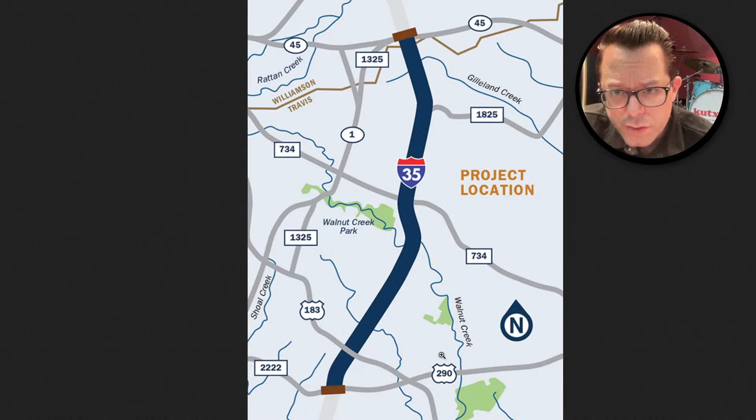But we're going to talk a little bit about the road lane shifting and how they're working this. TxDOT wants to keep at least 3 lanes open at all times during this project in each direction, with the exception of occasional closures at night.

So we have a lot to jump through here, and I want you to understand that it might seem like we are skipping some stuff because I don't want to spend 5 hours going through 4,000 to 5,000 pages of documents. Really, my goal here, because you can go and read the story right now, I'd like to just show you what I'm doing, and hopefully through this you will want to be able to look at these documents for yourself if you want.

If there's a specific intersection or a specific concern that you have, you'll be able to download these documents. They're linked at the website at the story. They're linked on our guide, our ultimate guide.

And sorry, I've got a lot of windows going on here, so I'm a little distracted. But we've got at the very bottom, I want to show you this, just get it right out of the way. This is a really long story, y'all. Look at this. Oh my God. See, we can't spend 5 hours doing this.

But right here, available for download, 1.8 gigabyte zipped file. And what we're going to be looking at is essentially 6 PDFs. And I'm going to go to them now. And they're all a lot of technical stuff like this. And I'll just sort of orient you, because I've spent a lot of time going through these, just give you an idea of how to find what you're looking for.

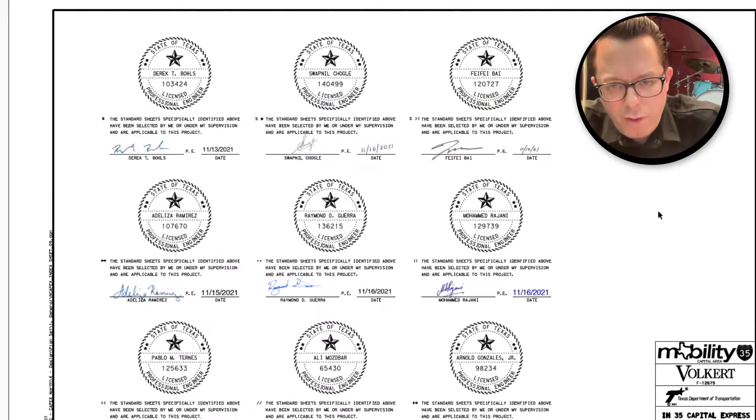I don't know. They could raise that if they wanted to, but a big question, and I'm going to do more reporting on this, so stay tuned, is does this actually work? Do managed lanes actually work? How do they enforce this? How do they make sure that there's at least 2 people in the vehicle? Because if there's no enforcement, it's just going to be like any other general purpose lane.

The lanes are also going to be available for use by transit vehicles like Cap Metro buses, and first responders, ambulances, and police, of course. We're going to go over some new bridges at Howard, Braker, Grand Avenue Parkway, and Wells Branch. The bridges at St. John's and 183 and Parmer are going to stay the same because those have been revamped in recent years.

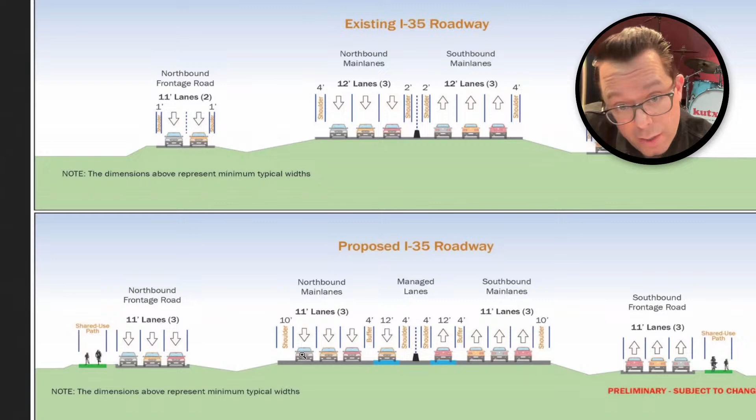This is not even quite accurate because they're saying 3 11-foot lanes northbound and 3 11-foot wide lanes southbound. But some areas are going to be 4 lanes wide. Some will be 5 lanes wide if you include the auxiliary lane, like main lanes. And then some frontage roads will only be 2 lanes wide at certain points. So this just gives you a basic idea.

They're making this road wider. The right of way is going to grow by 17 acres. So 5 auto businesses were forced to relocate because of this. Automobile businesses like repair shops and stuff. And there's a lot going on here.

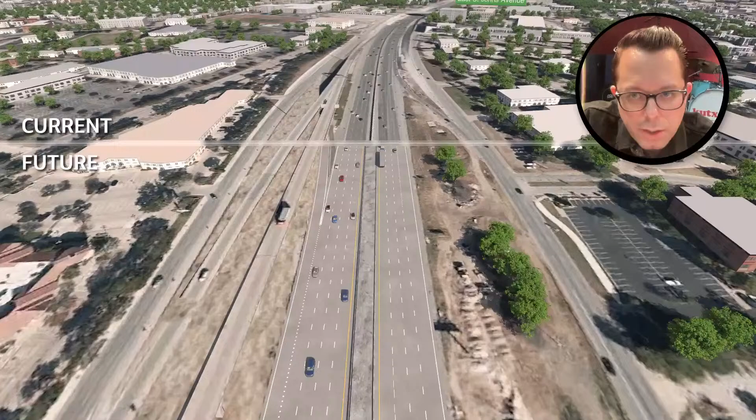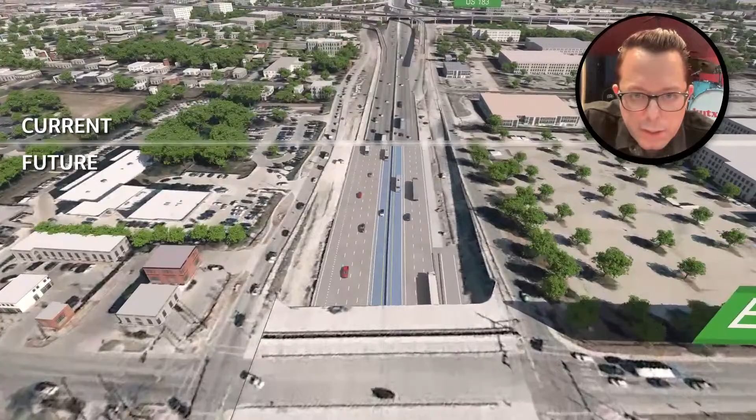So first of all, I got some drone photography for this thing. Check out this. I want to show you this. When I went to the groundbreaking, TxDOT had this fly-through video, which kind of gives you an idea. Of course, it's animation. It's a little sanitized, I guess, but it's a little mesmerizing, I'll be honest with you, these animations, especially when you're looking at a gigantic screen. But we're gonna go. So let's begin by starting at the very northern edge of this, SH45.

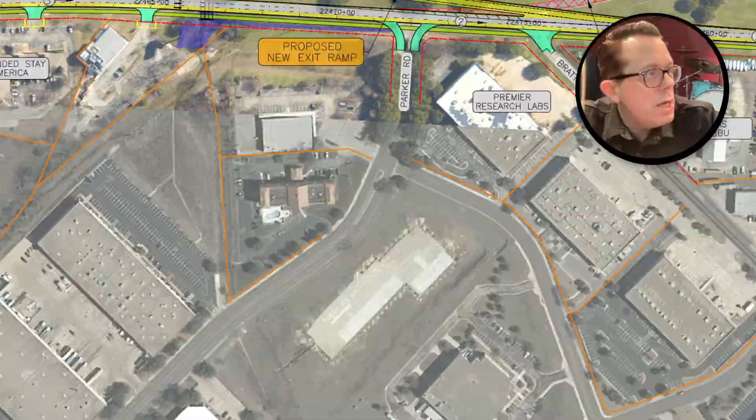And I think what we want to do now is first dive into the other document, which you can find linked on the story, which is the schematics. Now, these are from 2021. These are preliminary schematics. Parts of these have changed. So this is not the final plan. The final plan is in these documents, these 4,000 plus pages.

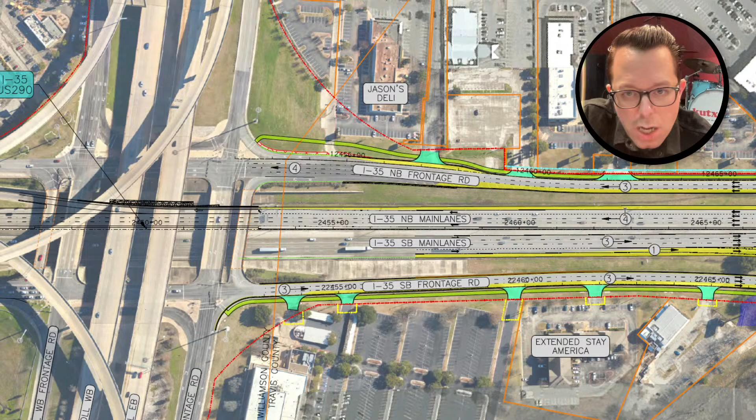So this is right here, SH45. And there's not going to be new ramps added from I-35 to SH45 as part of this. That will be another phase of I-35 expansion that is happening north of this point into Round Rock. TxDOT right now is sort of in the studying phase of that. And again, you can download this and take a closer look. But maybe let's start by orienting ourselves with the legend. And these legend colors aren't always accurate either.

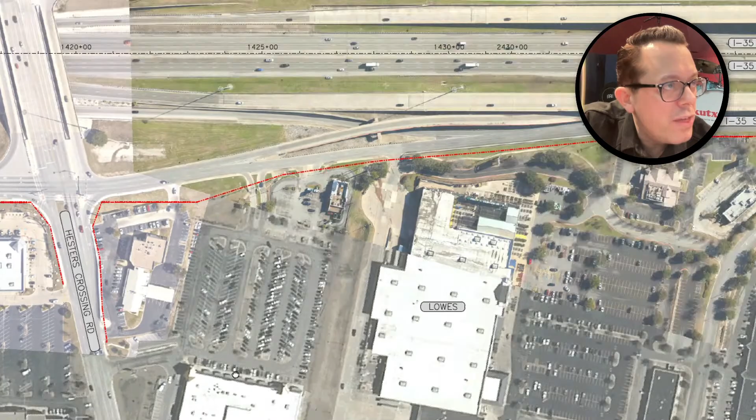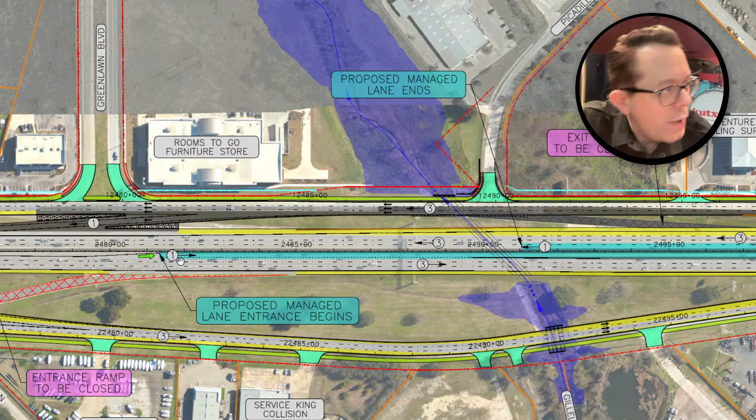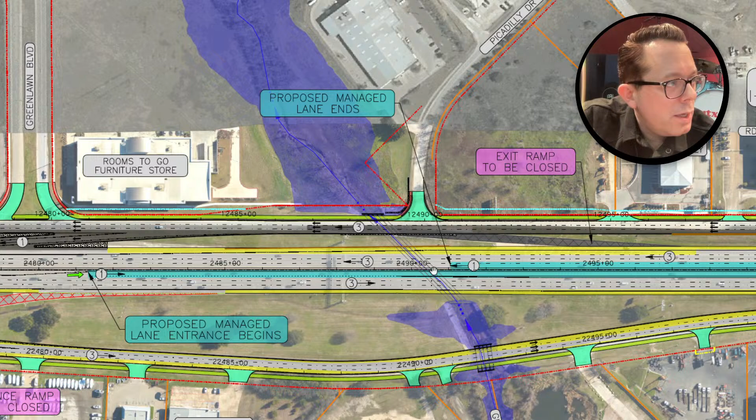But essentially, the main colors we want to be thinking about: these little arrows show where the ramps are going to be to get on and off the managed lanes. The managed lanes themselves are this sort of green color here. And then the yellow is new construction, new pavement. And so as we move south from SH45, we see where people will be able to enter the HOV lane just right around Greenlawn Boulevard, past this Rooms to Go. And a little south of there is where people will be able to exit the HOV lanes.

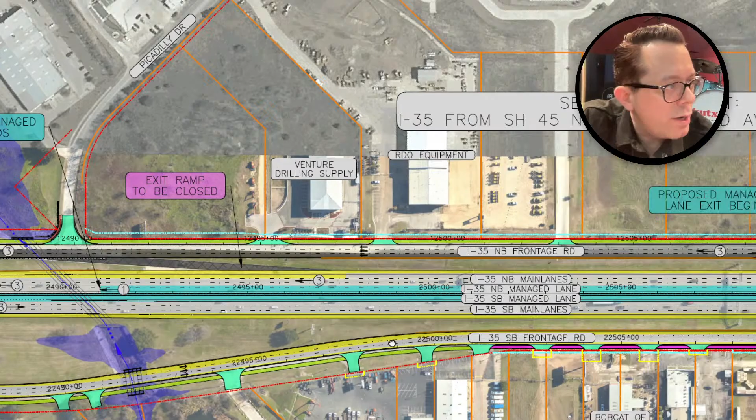And I should say, forgive me for not pointing this out in case it's not obvious, but in this schematic map, north is to the left. So north is that way, south is that way. And so we're working our way from north to south as we scroll this way through the project. Right here we can see there's some widening going on with the southbound frontage road south of SH45. Not a ton of changes here.

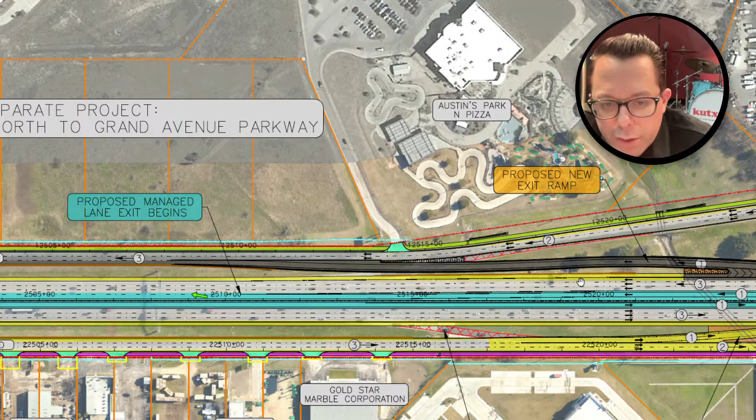This little green line is the shared use path, they call it, which is basically like a wider sidewalk for cyclists, pedestrians, scooterists, rollerbladers, someone in a wheelchair, you know what I mean, shared use path. Now, the schematic is 6 pages, and on the first page there's not a lot going on. It's the northern edge of the project. But you can see right here, this exit ramp will be closed, and there's going to be a new exit ramp here. And this is part of what TxDOT calls a ramp reversal.

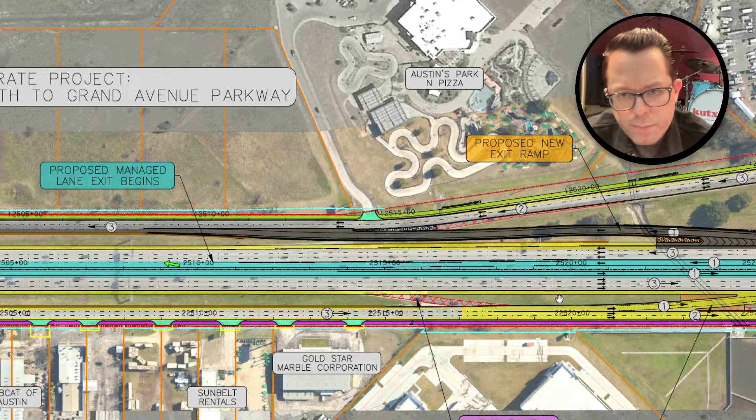And they're doing a number of these ramp reversals where they close an exit ramp and open an on-ramp, or vice versa. And the idea there, I talked to TxDOT about this and some engineers, and their thinking is basically new highway design standards make it safer, according to them, to have more distance, often more distance before the destination intersection. So it used to be like when you exit for Main Street, you want that exit to exit right at Main Street, and then you pull off and you're at Main Street.

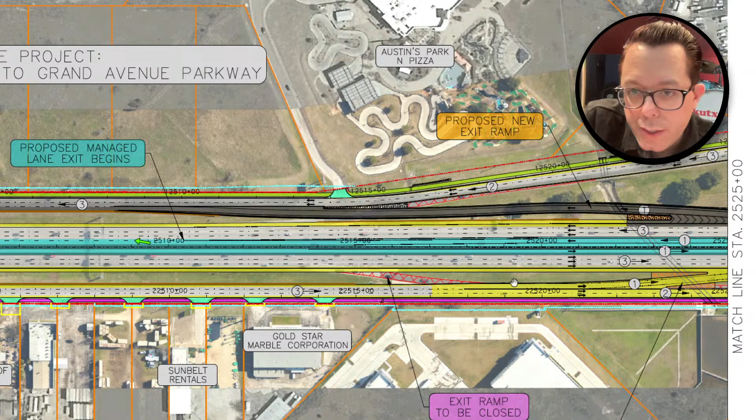But TxDOT is saying they would prefer, and it's not in all cases in these exits, to have more room for people to merge over if they want to turn right on Main Street, instead of having to cut across 3 lanes of traffic super fast. So here we've got a proposed new exit ramp. Now, some of these, and I don't have my notes in front of me because all my notes are in that story, but you can read through it. But some of these are just slight shifts when they talk about a new entrance ramp, or they're making the ramp a little more straight instead of a sharper turn.

Let's go down to page 2 here and go all the way over to the northern end. A lot of scrolling is involved in this. So here's our match line. And again, I wanted to try and teach you how to fish, so to speak, so you can look at these documents for yourself. That's honestly my main goal of this. And let me know if you have any questions.

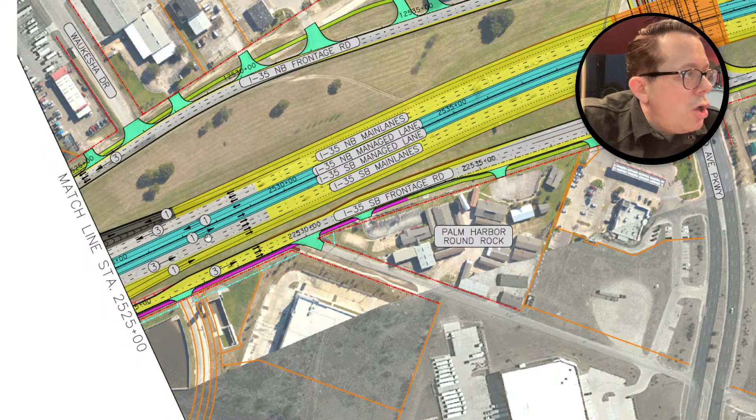So let's keep rolling along here. We're cruising south on the new I-35 Capital Express North. And here is where we start to see some more things going on. First of all, this yellow is, again, resurfaced road. This is just north of Grand Avenue Parkway, the first sort of major intersection that we reach, not including SH45 North. And let's just take a look at Grand Avenue Parkway, because I do have a nice little drone photo here of Grand Avenue Parkway. And there's something I wanted to show you about this.

So this is sort of an overhead. You can see they've already torn down the northbound bridge, and they've sort of divvied up traffic on the southbound bridge, and that's why you wind up with these super narrow lanes, 11 feet wide typically during the construction period, and some of them are going to be permanently 11 feet wide. But some will remain 12 feet wide. CapEx Central downtown, they're all going to be 11 feet wide, so they're going to be shrunken lanes.

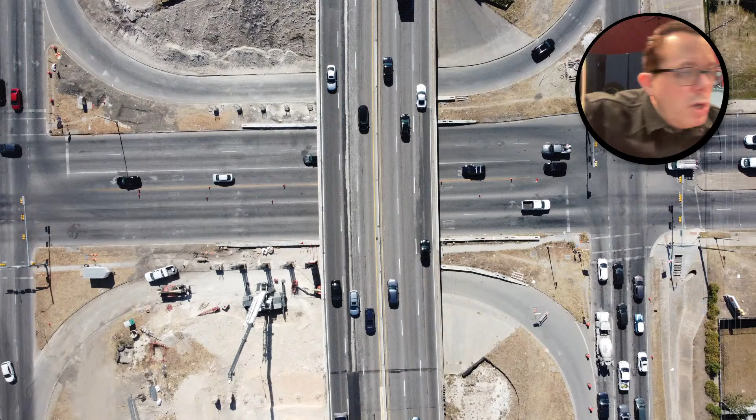And if you wonder what an 11-foot wide lane feels like, you can drive on Mopac north of Lady Bird Lake to about 2222. The lanes there are pretty much all 11 feet wide, including the express lanes. TxDOT and CTRMA shrunk the width of the lanes to fit them all in that area. So back to our schematic. This is where we're at.

And orange means new bridge. New bridge. This entire bridge will be reconstructed. And I'm going to show you something else up here real fast. I don't know if they have this. I might have to go back to the story. Here we are. So Grand Avenue Parkway itself comes up here to Central Commerce Drive. Now let me show you real fast what it looks like now, because this is going to change.

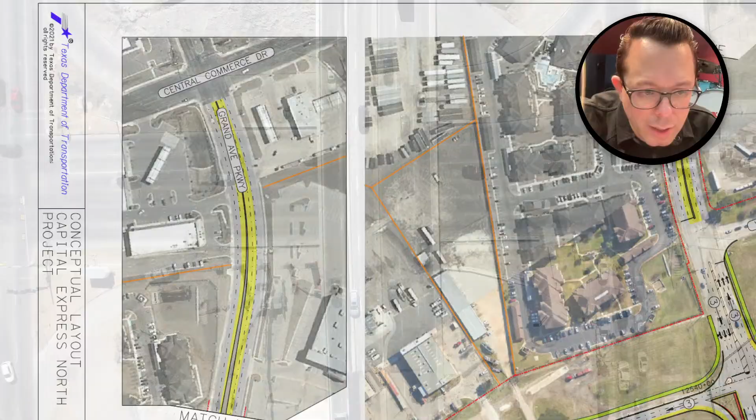This is just east of I-35, and you can see these medians in the middle of the road. They're kind of wide now. Well, when we get to, you see the yellow, these medians are going to be narrowed to almost nothing so they can add more lanes on Grand Avenue Parkway. So if I drove around there, I would be very interested to know that. Otherwise, sidewalks going in on the side here.

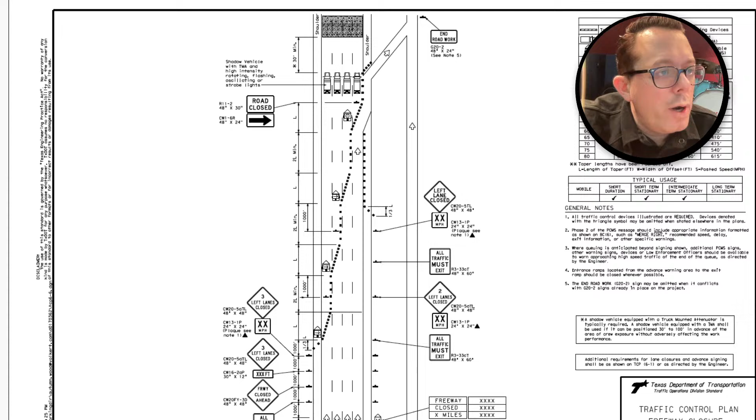And I have cross sections of these. So let's take a closer look at some of the more detailed drawings. These are called the 100% plans. And these are essentially the plans that are given to the contractor. These were designed by Volkert. And just quickly to orient yourself here, if you want to dive into these, I'm going to flip it to page 1. Okay, so there's 6 of these documents. Document 1 is 920 pages.

Just to give you an orientation here, if you're trying to look at these yourself, page 1 gives you a bunch of technical information, but the table of contents is really helpful to figure out which PDF to look at. And you can see volume 1 is a lot of the traffic control plans, the temporary stuff that they're doing while they're constructing the highway. Volume 2 has a little more detail, but I spent a lot of time on volume 4 and 5. Especially volume 4, because there's a lot of detail about the bridges and the cross sections they're going to be building.

Volume 6 is a lot of technical stuff like water lines and telecommunications and wastewater lines, the kind of thing your average person is probably not very aware of, but maybe that matters to you.

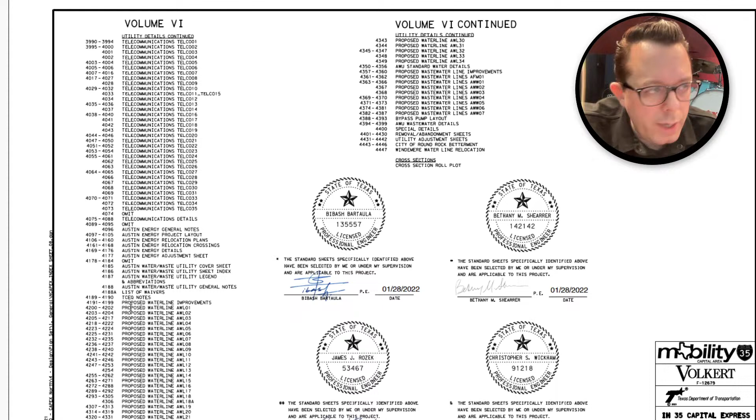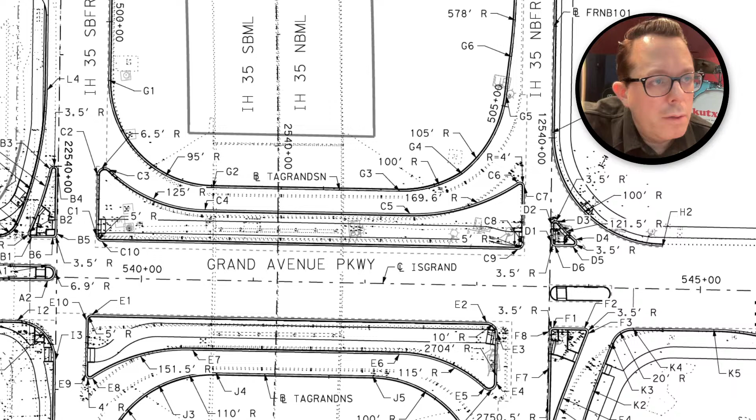So I have a bunch of bookmarks here. Now I'm jumping around. We wanted to look at Grand Avenue Parkway, and if you look at these docs, you can get a more detailed view. And I'm not going to spend a lot of time on all of these because we don't have that much time. But just if you're wondering, like, what is the layout going to be? Will there be a slip lane here? Yes, there will be. Let me zoom out a little bit, and then volume 4 here. Do I have Grand Avenue Parkway bookmarked? It's just a matter of doing a Control F and looking for your favorite street.

But another thing you can search is typical section. And this is going to be I-35 at Grand Avenue Parkway. And you can see it's going to be 3 12-foot wide lanes, because 3 times 12 is 36. I don't know if you can read that, 36. And a 12-foot wide managed lane in each direction, and a 10-foot wide shoulder. So it's not a huge change to where it is right now.

But also, if you are on this page and you go up, again, just to orient you, you can find the phased view, what it's going to look like while it's under construction. Right now, for your reference, we're under phase 2. So this is kind of what it looks like under phase 2 construction. Again, this is a proposed typical section, so some of this stuff could change. And then it's going to switch up to this in phase 4. So all of these proposed sections have the before and after, if you will, and then the in-between.

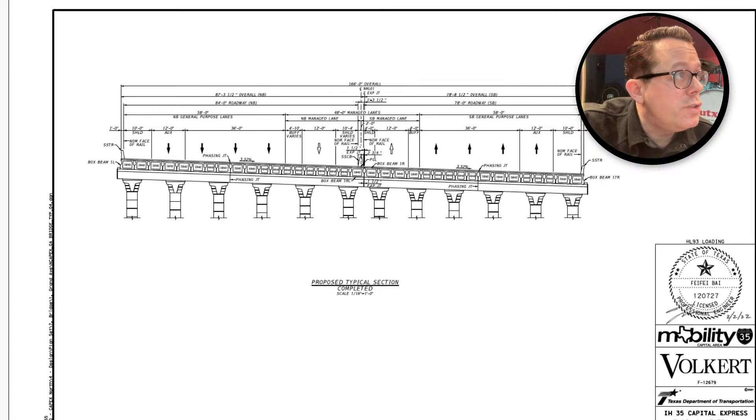Section 1 of this, there's a lot about the traffic control plans, and there's so many technical details here, but here we go, traffic control plan. Some specific information here that's relevant. A lot of this never made it into the story because 8,000 words is already long enough. But there's the contractor. These are directions to the contractor, which is Pulice. I think I'm pronouncing that correctly.

And they're owned by a gigantic Spanish firm called ACS, which is one of the world's largest construction firms, a huge mega corporation. They're building right now a dry dock for nuclear submarines at Pearl Harbor. That's just one of their projects. It's like a $2.8 billion project or something. So this is a massive company, but their subsidiary is Pulice. It's a little confusing if you're not used to seeing these trucks driving around that say Pulice on them. It looks like a law enforcement vehicle, but it's a U instead of an O in police. So it's not the cops, it's the contractor.

The shared use path will be the last item to be constructed. I thought that was interesting. They talk about how they're going to put these along the entire length of the highway in both directions, but it will be the very last thing to be constructed according to the traffic control plan here. But pedestrian traffic must be maintained at all times.

If you are a business owner along the highway, you may be interested in this. They're supposed to be contacting you at least 5 days before they do any driveway construction. So you should get advance notice. 5 days is not a ton of notice.

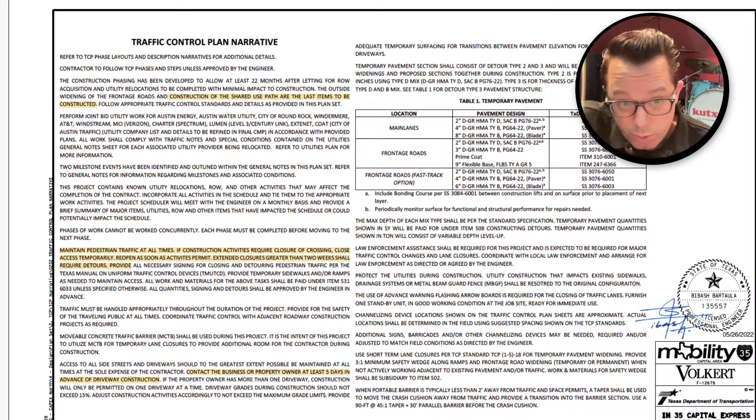And then, are the bridges being reconstructed for better safety, integrity, or to accomplish something else? Jennifer Thal. Great question, Jennifer. The bridges are mainly being reconstructed because they have to be wider. The I-35 bridges over cross streets are being reconstructed so that they can have more space for all of the lanes. And then the cross street bridges, and there's only one that's being reconstructed, which is Breaker. It's not a huge change, but we will get to that.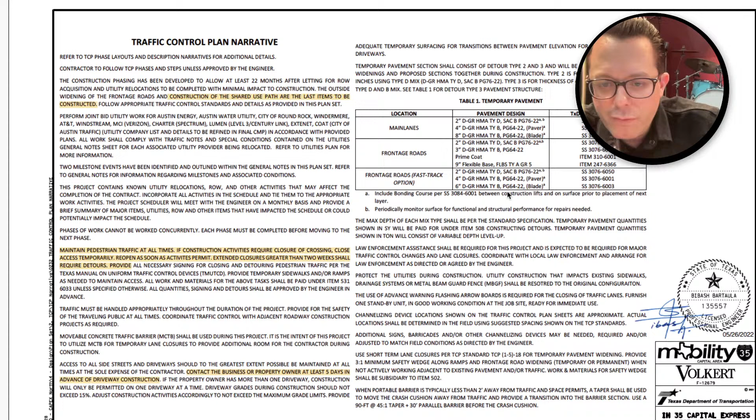Let me jump here. I think those are all the questions for now, but if you have more, pop them in the chat. This is going to go longer than half an hour. I'm sorry, but we're just getting started here, and I'm enjoying this. I hope you guys are too, because I love to nerd out on this stuff, and it's in these details where the devil hides. This is where you find out what's really going on. You have to scroll to learn.

But I just wanted to walk you through real fast, and let me zoom out a little bit so you can see. I wanted to orient you. If you're opening these, keep an eye on this bottom right area here. This little square kind of tells you where you are. So when you're flipping through real fast, it's almost like a flip book. I found this immensely helpful to orient myself, especially as I'm doing a Command F, enter, next, looking for something related to a specific street.

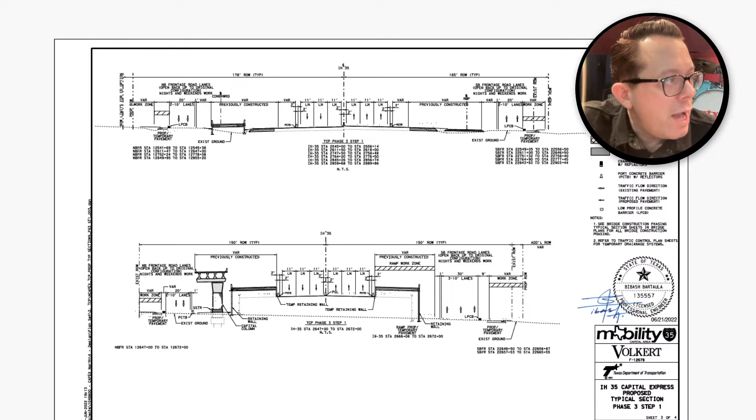These are the proposed typical sections. Throughout, again, there are the match lines, or the location identifiers that you can match up with the schematics if you really want to know more. But let's just zip along here and try and move along a little bit faster. So I really want to open up my story, because I don't remember off the top of my head all of the changes that are coming to every single section. But I can talk a little bit more about it as we scroll through.

Now, one thing that I have to apologize for is that when you're reading this story, you can't click on the images and make them bigger. It makes me so mad. But what you can do is right-click and download the image, or more easily copy image link. Or what I'm going to do is drag the image up into my browser, and it opens full screen. So these are bigger images. They're just shrunken on the website. So that will hopefully help you get a closer look without necessarily having to dive into the schematics. So we talked about the ramp reversals.

Pardon me while I get a drink of water here. I've been talking a lot.

Ramp reversals. Let's just keep moving a little bit further south. We cross over Gilliland Creek here. This is one of several creeks, 9 creeks that this project crosses over.

And I thought this was interesting. TxDOT says the highway is being constructed to allow for inundation of the roadway during a 100-year flood without causing damage to the road or property nearby. This is just a map of Gilliland Creek. Basically this creek wouldn't cross I-35. It's all the runoff from the highway and from SH-45 that makes it that much further, because the source of Gilliland Creek is Ward Spring outside Pflugerville.

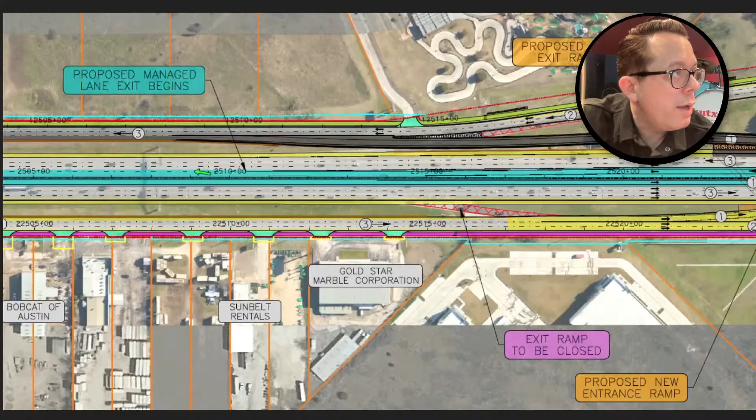But as we move a little bit further south here, and let's just make this a bit bigger, you can see what's going on here. And where are we now? We are just north of Grand Avenue Parkway, which I think we've gone over before, right? So now we're at Grand Avenue Parkway. I showed you the changes there. I showed you this cross section. New bridge over Grand Avenue Parkway.

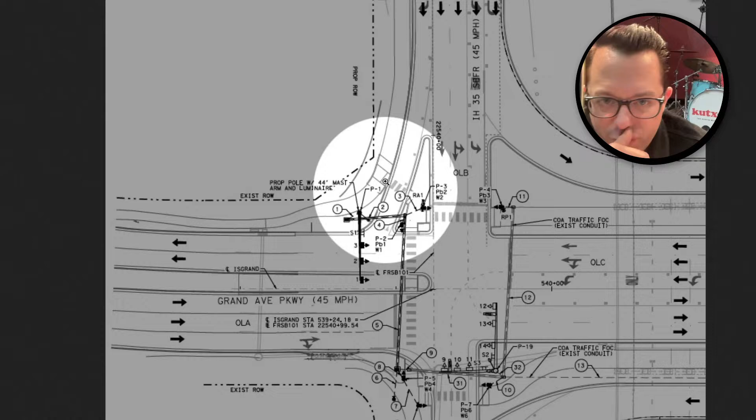I wanted to highlight these slip lanes. You're going to see a lot of these throughout the project. What a slip lane is, probably most of you know if you're watching this live stream, but it's a lane where vehicles can make a quick right-hand turn without having to stop for a pedestrian or for a traffic light. And it's great if you want to turn right, not so great if you're on foot and trying to cross the street, because you just kind of got to wait for your moment and then make a break for it. It's only one lane, I realize. It's only 15 feet or so, but it still can be kind of a pain in the butt.

And so there's going to be this slip lane here. This is the southbound frontage roads. I know this is sort of oriented in a weird way, but these are the southbound frontage roads turning right onto Grand Avenue Parkway. And then the northbound frontage road is going to get double right turn only lanes at Grand Avenue Parkway, but there will be a traffic signal there. So that's one of the differences that TxDOT is doing. And I already talked about the changes to Grand Avenue Parkway east towards Central Commerce Drive. It's going to get another lane in each direction, essentially.

As you're going through these, what I did is I had Google Earth open so I could compare side by side, because some of these are not accurate. And I don't know this section of I-35 as well as I do South Austin, because most of my time in Austin I lived in South Austin, and I live in South Austin now.

But for example, this exit ramp to be closed should read entrance ramp to be closed right here, because we're talking about going north on the frontage road. Again, the ramp is being closed, but it's just shifting, so it's a little bit more of a gradual merge onto the highway. And then going southbound here, some new surfacing.

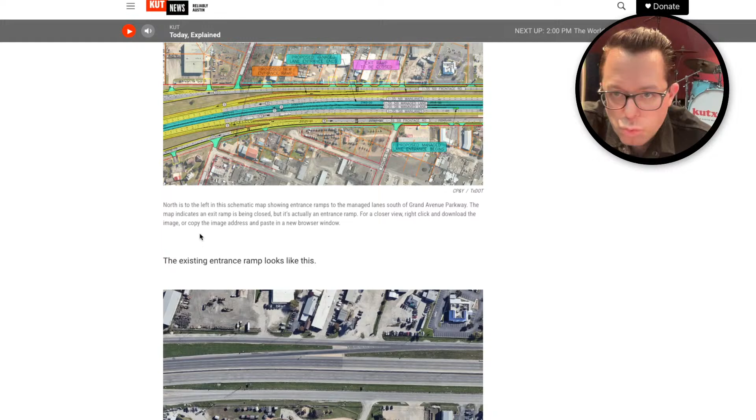And then right here, sort of south of Grand Avenue Parkway, is a new entrance for the HOV lanes. And where are those on-ramps? Is it going to be near where I live so I can get on the managed lane, or do I have to go down like 3 traffic signals or 2 exits or 2 intersections, cross streets? So

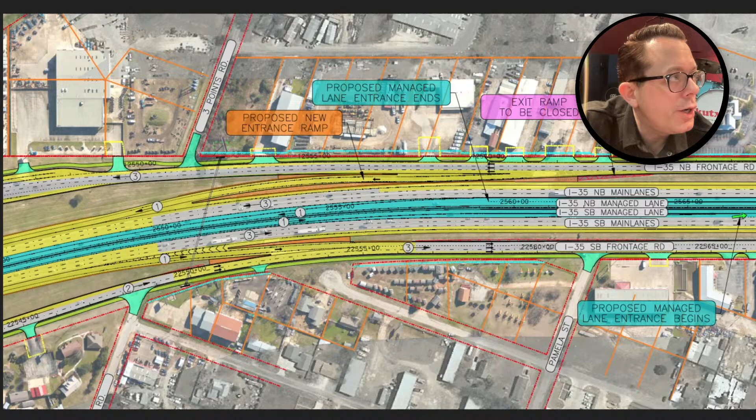let's keep going here. On Pamela Street, another opportunity to enter the southbound managed lanes right here. This is what these green arrows are. If you're looking through the schematic, you can see where those are. So a new ramp, proposed new entrance ramp. We're having new ramps here. Ramp action happening.

Now, I added this late in writing this story, but I just wanted to show you what I'm talking about. Some of these ramps are a quote unquote new ramp, but what they're doing is just smoothing out the drive on the ramp so it's less of an extreme angle. I don't know if you can see this, but in the satellite view it's a more harsh on-ramp, and this one is more gradual. So there's that. Let's keep rolling down here. Wells Branch Parkway. All right. So, okay, Wells Branch Parkway.

Let's get to, we have a new question here. Sarah Jenkins says, what types of sound barriers will be constructed and where will they be? Excellent question, Sarah, because there's going to be 8 sound barriers, and here, this is Wells Branch right now, but I want to get to the sound barriers, because to me, I'm an audio guy.

I work in radio. I love audio, and I'm fascinated by sound, and I've reported on the noise barriers and the noise concerns for this project before. So there are going to be 8 of them. However, it's important to note that many of the locations that will have louder sound because of the expanded highway will not get sound barriers. And there's a reason for that we'll get into.

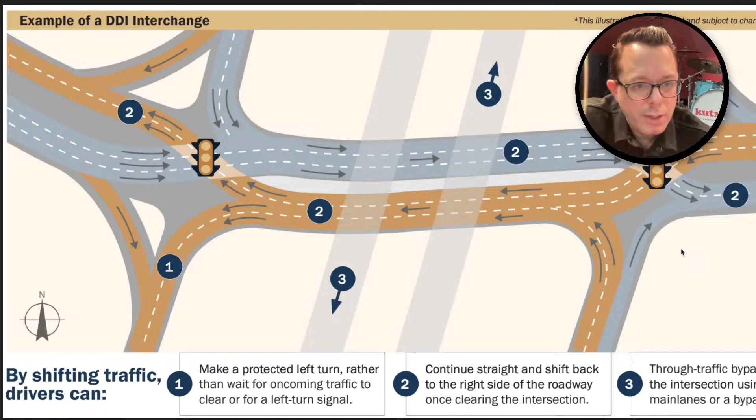I just did want to show you this because I have an animation that illustrates what it is like at Palmer Lane. Oops, I turned myself off when I wanted to turn off Wells Branch. And so this is at Palmer Lane. You kind of see the flow of traffic here, and one of the disadvantages of these, if you use I-35 regularly in this area, is if you're on the frontage road, you cannot continue south or north.

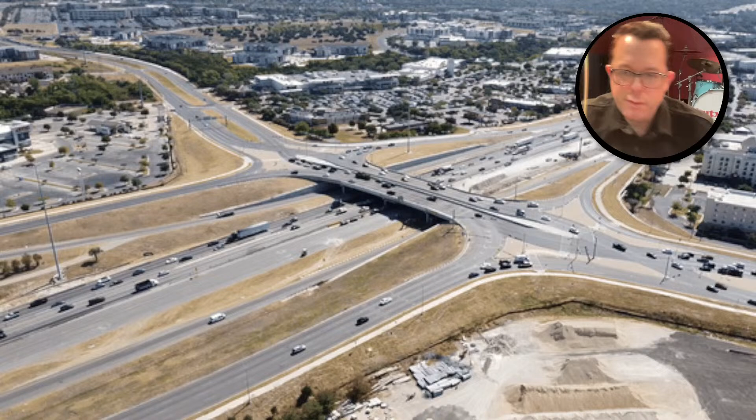You have to basically take the bypass lane, which you can see that little white truck going southbound on the bypass lane. Or if you miss the bypass lane, you have to take a right down here on Palmer, go down, do a U-turn, come back on the westbound lanes, and then continue southbound, or vice versa on the other side. So they're not perfect, they have some advantages and disadvantages, and TxDOT has decided that Wells Branch is going to get a DDI.

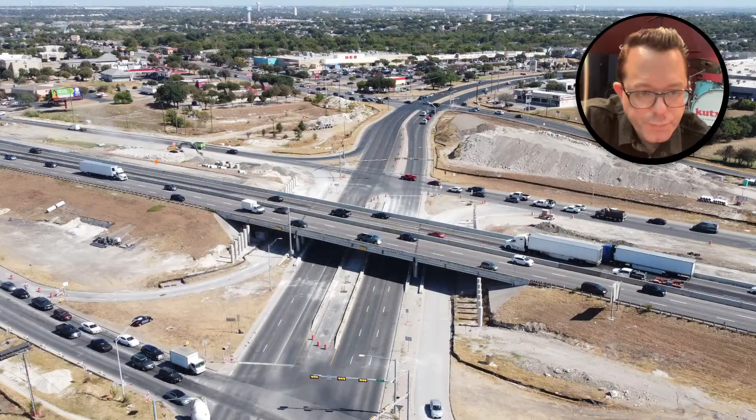So let's see what that will look like, because we have an illustration right here, and this is from the schematic. Very similar to Palmer Lane. This will be the first DDI at ground level in the Austin area. The one at 360, I believe, will also be at ground level. Basic configuration, you get the idea. DDI at Wells Branch, diverging diamond interchange, and you can look that up.

In fact, there's this TxDOT video, I'm going to mute it. There's this TxDOT video that was made when this one opened in, what was it? 2015, 16? I forget when the first one opened in Round Rock, but it kind of shows you the animation. So we don't need to go over that forever.

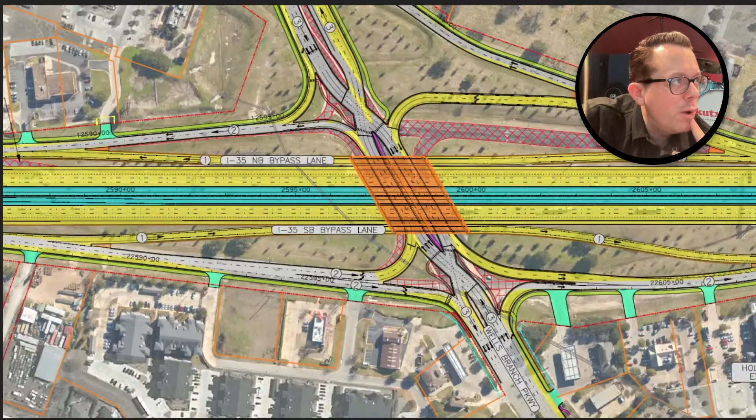One more point. This is just to highlight my point that if you're a pedestrian, you're going to cross these slip lanes. This is Wells Branch, right? This is with the DDI. You're going to cross this unsignalized slip lane, no traffic signal. Here, there will be a traffic signal. Then you'll be walking on a shared use path between 3 lanes on one side, 3 lanes on the other, and then you cross back over here, depending on what direction you want to go, right?

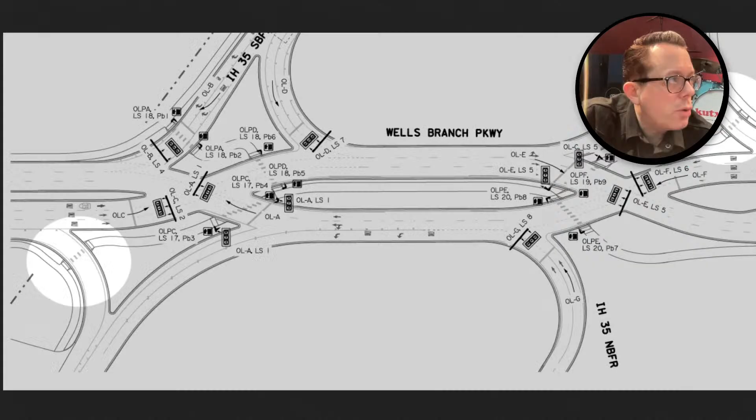So this is some more information that just shows where the traffic signals will be placed in this DDI. Again, you can see all this in the story. Let's just take a quick look at this cross-section. So this is the cross-section of I-35 at Wells Branch. This is what it will look like.

And we see something here that's very different than the initial cross-section that we had when we first started showing. I think I might have closed it, but it was one of these, the colorful one. This is the actual plan, and this is the typical section completed. So let's start from left to right here.

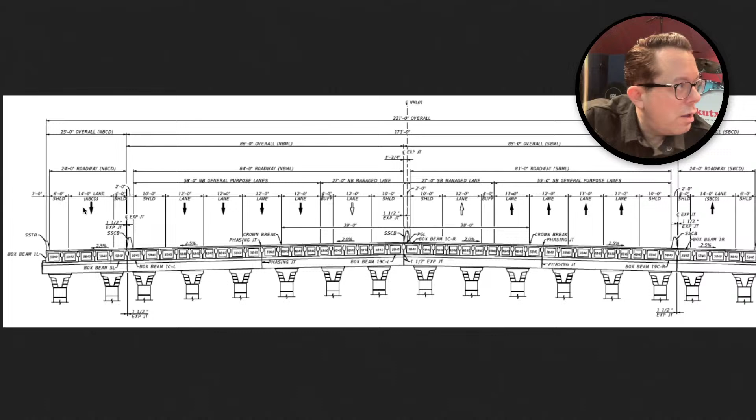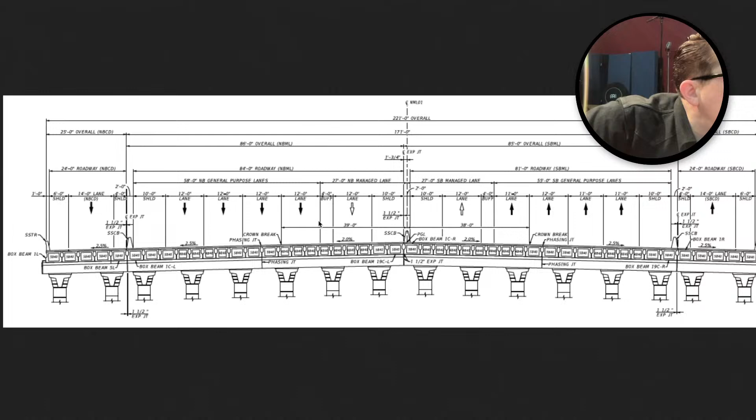6-foot shoulder, a 14-foot collector distributor lane. This would be the bypass lane, I think that's what that is, if you want to avoid the DDI, the interchange. Okay, main lanes, 10-foot shoulder, 12-foot, 12-foot, 12-foot, 12-foot, going northbound, 12-foot, 12-foot, 12-foot, going northbound.

Southbound, managed lane, 11-foot, 12-foot, 11-foot, 11-foot. So narrower lanes, a little harder to stay in between the lines, a little more nerve-wracking at times, but there's arguments that people will drive a little bit slower. There's been some research on this. I did a whole story about lane widths and how that can affect driving, but it's a little less comfortable in an 11-foot lane, especially on a freeway like this.

We're not talking about side streets where we're worried about pedestrians crossing, and this is like a limited access freeway. People are going fast, and so 11 feet is not as comfortable, but it does allow them to cram in more capacity without having to seize as much property.

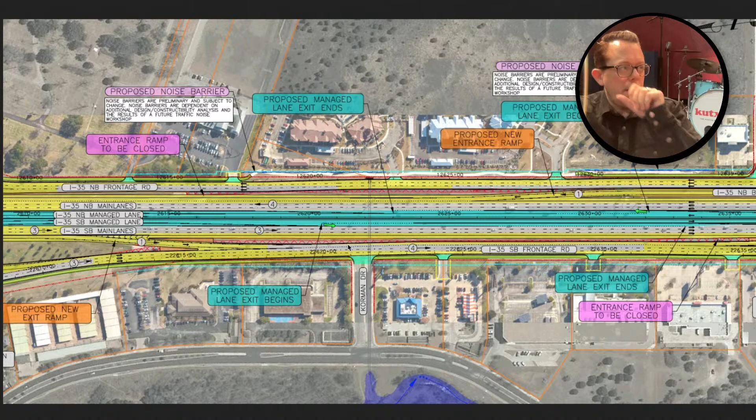So again, we're moving along here. This is south of Wells Branch Parkway now. And as we go south of Wells Branch Parkway, you see some reconfiguration of the ramps here, an exit for the southbound managed lane, exit for the northbound managed lane, some ramp shifts and reconfigurations.

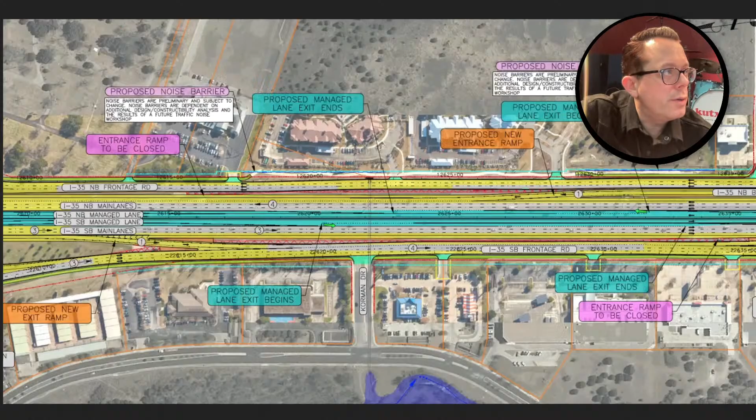The Federal Highway Administration, FHWA, has certain noise limits for different types of properties, like hospital and child care center versus residence versus business, etc. And each one has sort of a benchmark, essentially an average of the noise. If you go over this many decibels, you have to consider. I'm sure anyone who is a specialist is cringing right now because I'm giving the super simplistic version. But basically, if it gets too loud, they got to build a barrier.

But they only have to build the barrier if, how can I say this? Well, I said it right here. If it costs less than $25,000 per benefited receiver. What is a benefited receiver? What TxDOT does is they put these little receivers, like noise loudness testing machines, in certain locations along the highway, and they have a map in their

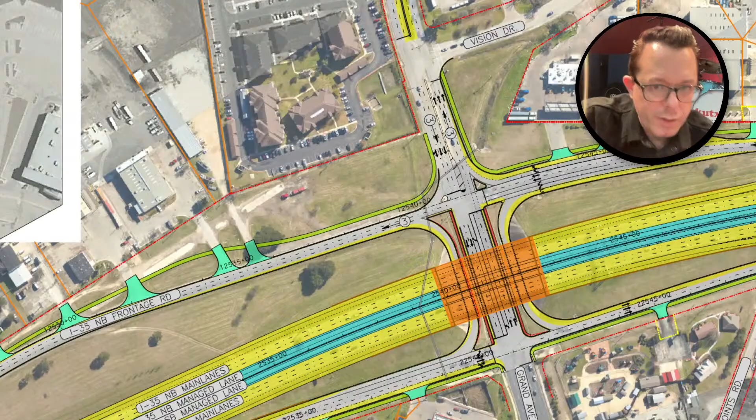sorry, I'm just jumping around windows here, their environmental impact statement, which I thought I had open, but I guess I don't. Let me just crack that open real fast, so I can show you where all of these receivers are, because this is an important piece of this project. It really is going to be louder, and not everyone is going to be able to benefit from a noise wall. Of course, noise walls have their drawbacks too. They block the view. They can block airflow in certain ways.

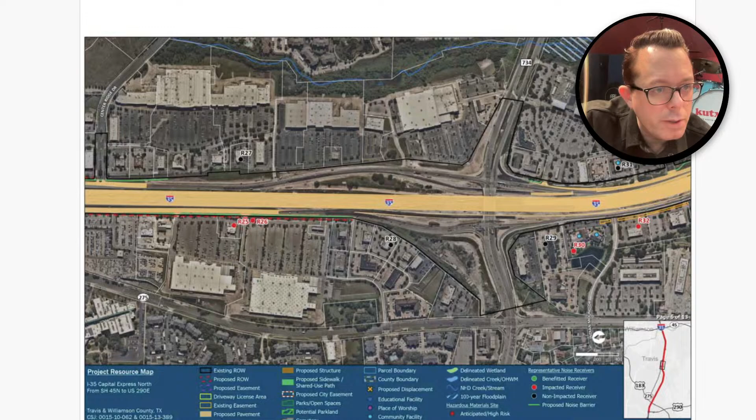But let's see if I can open my noise barriers. Okay, so it's right at the bottom. It's Appendix F. Okay, maybe I should just rotate this. So you can see here these R25, R26. Have I got all these windows open? Let me zoom in a bit more here for you. So this is like a receiver, receiver 25, receiver 26.

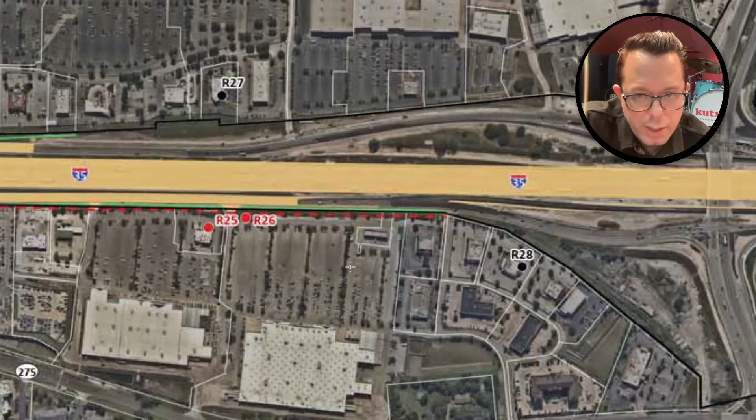They did almost 100 of these different receivers where they put them in and they test the noise levels, and then they use some mathematical calculation to determine how much louder the noise will be. And you can read more about their mathematical calculation in their actual noise traffic technical report right here, which is linked to in the story, and they go through some of the methodology.

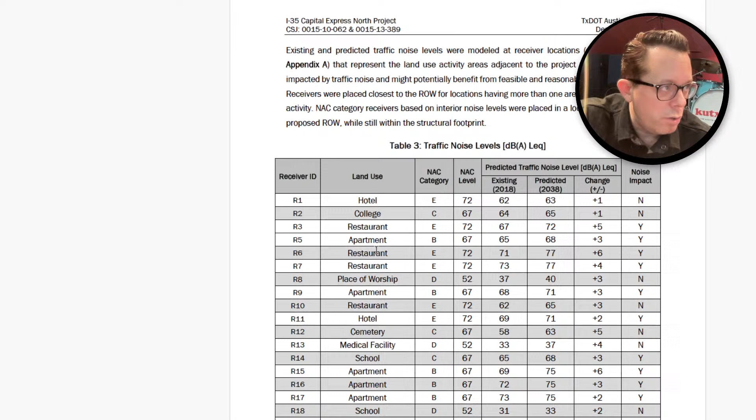But like you can see here, R1, receiver 1 was a hotel, receiver 2 was a college, and let's take one here. Receiver 6 was a restaurant. The NAC level, which is sort of like the federal standard, is you want to have it no more than 72 decibels. And I'm saying decibels, but it's like a measurement of decibels that is an average. I won't get into the details of that, but let's just say 72 decibels, right?

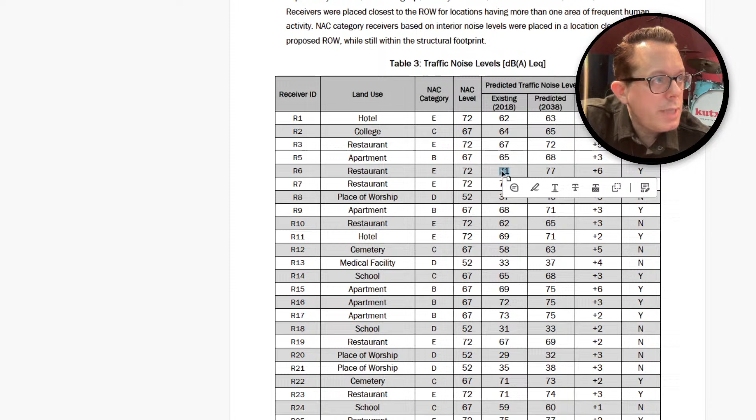That's the NAC level at this restaurant. In 2018, when they did this, it was 71. And the predicted traffic volumes in 2038, it's going to be 77, so 6 decibels louder. Now, what is a decibel? Just for some reference, if something's 10 decibels louder, it's basically perceived as being twice as loud. If it's 10 decibels quieter, it's going to sound as if it's half as loud. It's sort of a logarithmic thing.

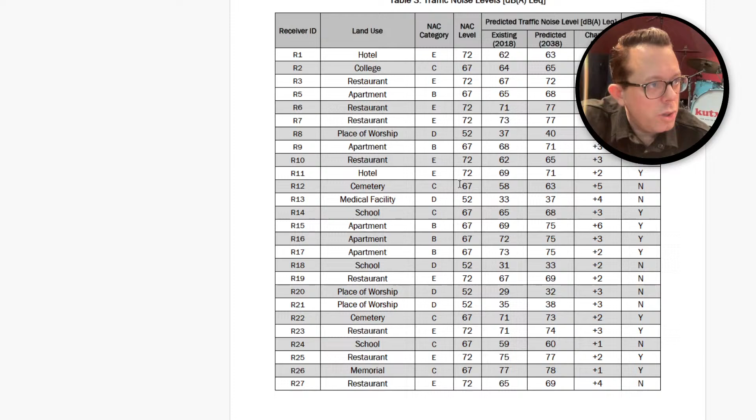So will there be a noise impact? Yes, there will be a noise impact, but this restaurant will not be getting a noise barrier because of a number of different factors. Among them is this calculation that for each of these receivers, if the noise barrier per receiver or per benefited household or whatever costs more than $25,000, then they don't have to do it because then it's not considered reasonable.

And if a noise barrier that is 20 feet tall would not reduce the sound by at least 5 decibels at at least half of the receiver locations in that area, then it's not considered feasible. And it's not required under federal law. And this is an issue with all highway projects. It's not just an issue with I-35.

So let us take a look at some of these noise barriers. So Lantower Ambrosio Apartments on the east side of I-35, south of Wells Branch, is going to get a 510-foot-long noise wall that's 16 feet high. That's going to cost $146,000 or about $8,000 per affected household.

Another fascinating thing is the Cook. So let me go back to the schematic here. There's 2 cemeteries along this route, and one of them is right here at Wells Branch, Capital Memorial Park. They're both owned by the same company, Cook Walden, and we have the email that Cook Walden sent to TxDOT here that basically says, nope, there's no interments of any type outside our fenced area. So go, we're not worried.

So TxDOT is not worried at all, because in that area, all of their construction will be contained to the right-of-way footprint of the highway. So they're not worried about digging up graves, basically. But both of these cemeteries are going to get louder. These are quiet places where you go and reflect on your lost loved one.

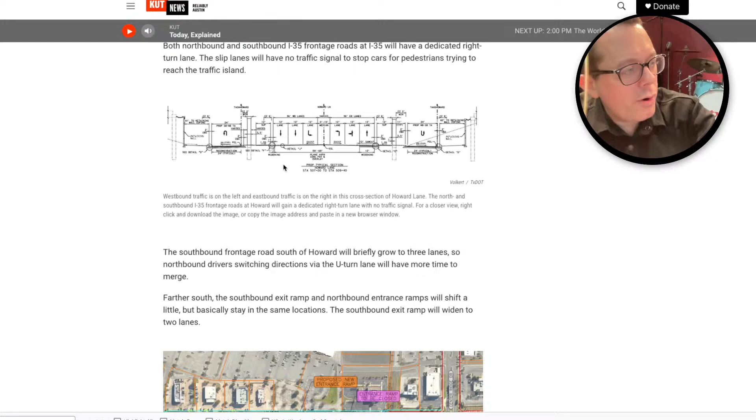I don't want to take more than an hour of your time here, so I'm just going to zip through some of the rest of this, and then you can go through and check this all out for yourself. This was a ton of work. I can't really explain everything in an hour. This was an interesting component that I learned about, and it's not in the schematics, and it's not in the environmental report. I only learned about it from talking to TxDOT and Cap Metro.

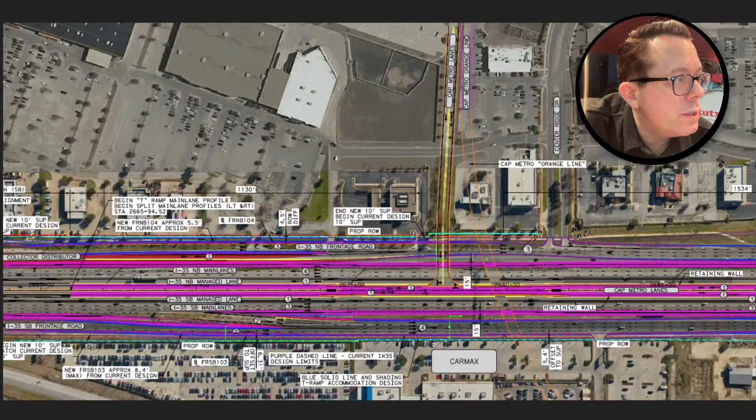So let's go to the Tech Ridge Park and Ride. I don't know if you've ever been here before, but it is a place where you can park and ride. And there's a whole bunch of different transit routes there, 135, all of these you can get to from the Tech Ridge Park and Ride. So what is going to happen here is TxDOT's going to build a ramp, and it's not like a huge flyover ramp for northbound and a huge one for southbound. It's more like just a bridge over the highway. These are going to be elevated, and you can kind of see that in this cross section. So you have this elevated bridge that crosses over the highway and goes up here to the Tech Ridge Park and Ride.

And essentially the idea here is, with Capital Metro buses, you want people to ride transit, you got to make it faster than driving. And this is maybe one way to do it, at least driving alone, because of course if you have 2 or more people in your car, you can take the managed lane yourself. But this could improve Capital Metro service if they can keep the managed lanes flowing. Of course, that's a very big if. And I thought this was interesting: Cap Metro Orange Line, this orange line coming through here. There's not going to be an orange line coming up here for quite a long time, but I guess if they do want to build it there, they're thinking about it at least.

Okay. Palmer Lane, not a ton of changes because this DDI was just installed pretty recently, although they're going to do some resurfacing here where, as you can see in the yellow, this is all new pavement. This bypass lane that's proposed already exists.

South of Palmer, a new northbound entrance ramp. See, northbound entrance ramp right here. And this exit ramp. So you can kind of see you're on the bypass lane coming from Yeager, Tech Ridge, and then, well, this is only northbound at Tech Ridge, it's on the east side, right? Yeah, I think so. So you're coming over, you've just passed over Tech Ridge, and you can either get on the frontage road just south of Palmer, or you can merge left and get on this new on-ramp to get on the main lanes.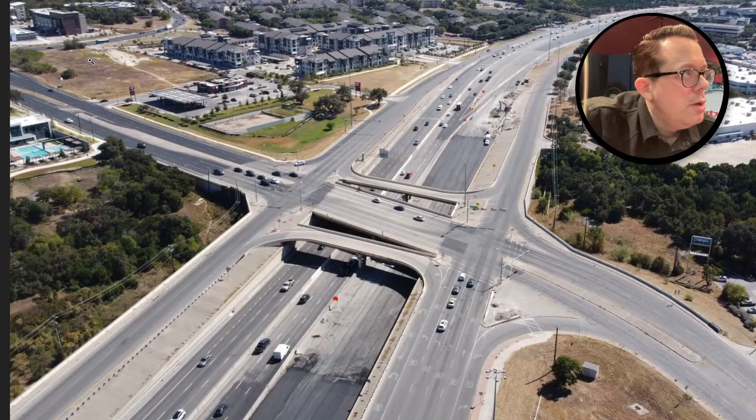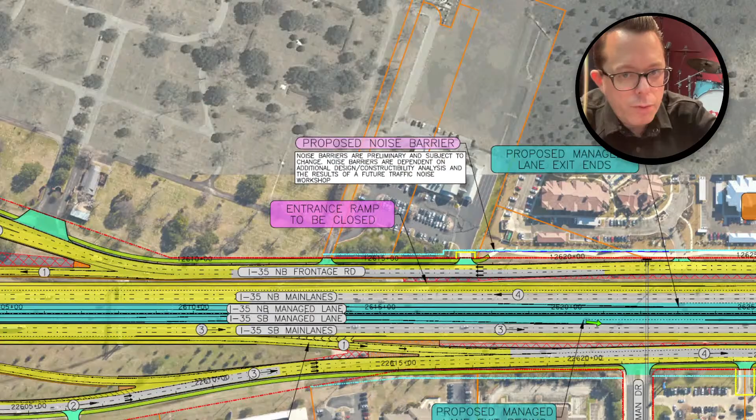Now, this is another one where there's going to be some changes. Yager Lane, Tech Ridge. Heavily used intersection as any. And what's going to happen here is there's going to be this bypass lane. Again, orange is bridge. So the bypass lane, 2 lanes, bypass lane to cross over the intersection and continue along the frontage road, should you wish to do so. And if we go back over here to our Acrobat, to our schematic, I'll just go down to the next page here.

And we could do like an 8-hour live stream. Should we do 8 hours, Chelsea? No. Sorry, I'm sorry if you've been sending me questions. It looks like you have. All right. So there's messages from other folks. Okay, cool.

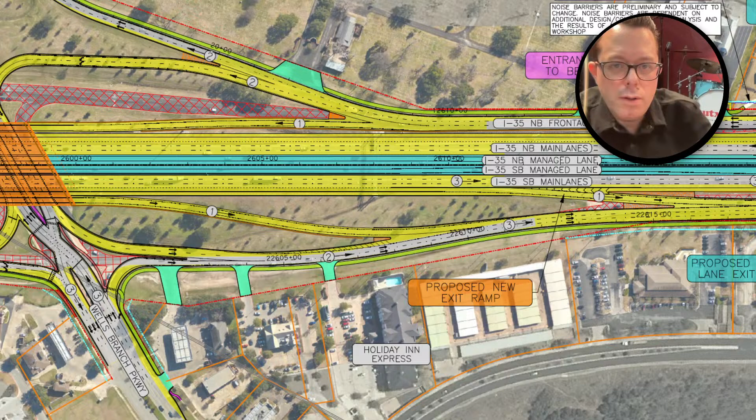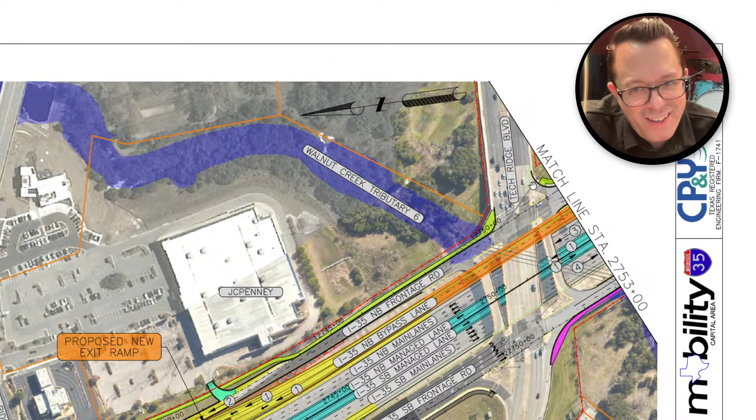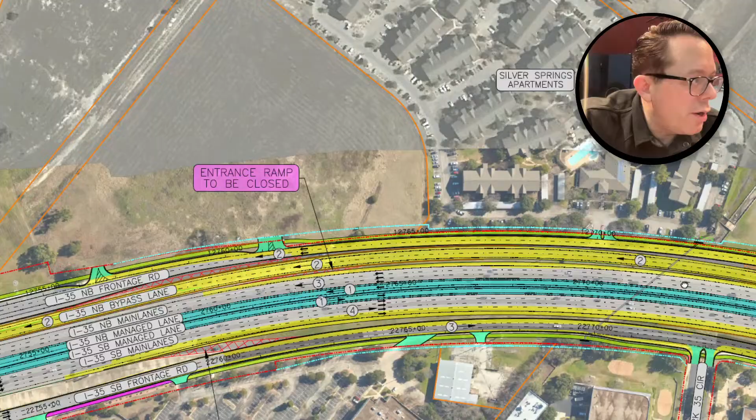Wells Branch, keep going. I'm trying to catch up here to Tech Ridge, which unfortunately is really annoying. They put the match line right here, Tech Ridge, but we're going to go a little further south here just to show you what leads up to that bypass lane, which is a lot of scrolling. See, boom, you're on the frontage road. You go off the frontage road to get on the bypass lane. The bypass lane takes you up and over, and I gotta do keyboard shortcuts with this. I'm not used to using OBS, y'all.

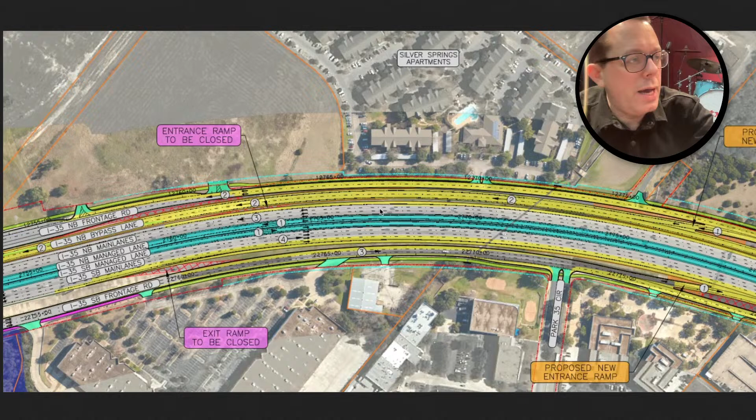Continuing south on our journey here, I want to kind of zip through here. This was an interesting thing for some folks, speaking about the local impact of these changes. Folks here who use Park 35 Circle, like TCEQ is here. I think Girl Scouts of America has an office here. There's a bunch of people who live west of here. Again, north is to the left. They didn't like that you pull off Park 35 Circle and you got to cut over 3 lanes to get to this on-ramp. But TxDOT's like, it meets our design standards, so we're just going to keep with that. If they moved it, they said it would require more land seizures and more business relocations. So you can read more about that.

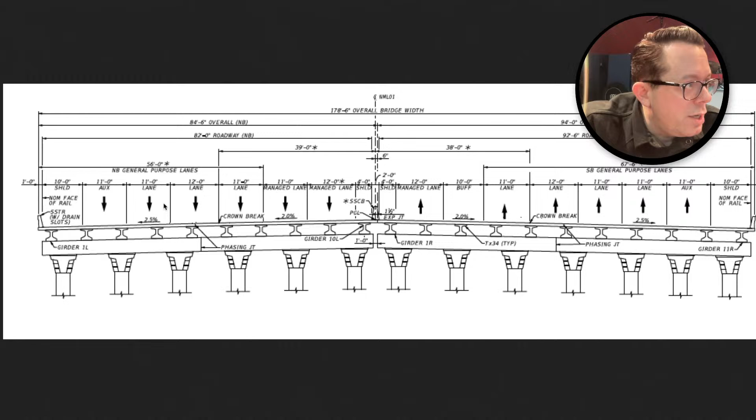Bridges over Walnut Creek being totally reconstructed. This is really a massive, pretty significant change. Here's the cross section. This is the bridge over Walnut Creek. So this is just the main lanes. The frontage roads have their own bridges. So we're talking northbound here, 11 feet, 11 feet, 12 feet, 11 feet. Those are the general purpose lanes. And then I think this is a merge for the managed lane.

12-foot managed lane, 12-foot managed lane, 10-foot buffer, then 11, 12, 11, 11, an 11-foot auxiliary lane, which is sort of like a long merge lane in a way. So 1, 2, 3, 4, 5. 5 lanes, general purpose, going southbound over Walnut Creek. So it's not all just 3 lanes or 4 lanes in each direction. Let's continue our tour here.

I walked across this bridge and it was not very pleasant. And if you have walked across this bridge, you may have also experienced it. The I-35 bridge over Walnut Creek, this thing. Walking right here, it's a narrow sidewalk and cars are zipping down. They're coming down the hill, so they're kind of accelerating. And there's barely any buffer between you and the vehicles. And then there's a little railing, and over the railing is a dangerous, potentially deadly fall. And it's not the kind of railing you can hold on to because the railing's like this big. So it's really big if you can't see my hands. So this is going to be a change to that.

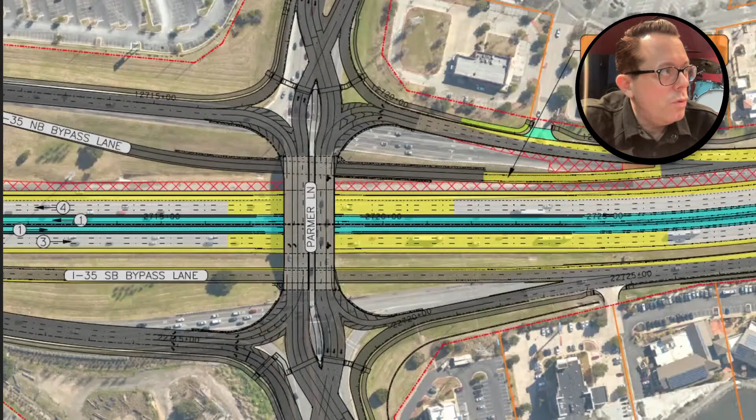14-foot wide shared use path, 14-foot wide sidewalk, and then a little railing right here, 6.5-foot wide shoulder, and then the frontage road lanes, which will all be 11 feet wide. So a little bit of an improvement for people trying to cross Walnut Creek.

And another piece of this, as we approach the hour mark, I just want to tell you that there's going to be an east-west pedestrian crossing under this and under Little Walnut Creek. It's still kind of in the early stages. It's still being designed, but I thought I had an image of it. Well, I have the one over Little Walnut Creek, just showing

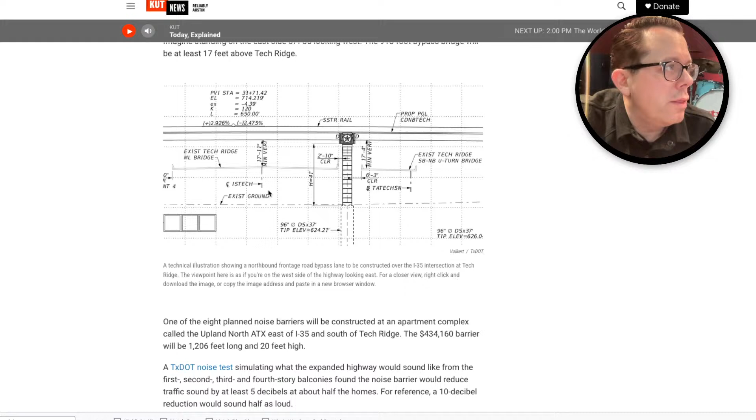There's so many drawings, dude. Okay, you can see here, this is like a very rough drawing, but it just kind of shows you how there would be some. Oh, no, that's not what I thought I was looking at. Sorry. It's really easy to lose your orientation. So anyway, we're just going to zip down through the rest of this. And you can go to this website and see all the changes for yourself.

But the main thing that I just want to leave you with, this is like a tree that's believed to be 700 years old or more. TxDOT has promised to protect this tree. It's like 5 feet wide, and it's in the parking lot of a Northern Tool and Equipment. So that should hopefully survive. It's maybe one of the oldest trees in Austin.

In fact, Matt Largey has a story here. What is the oldest tree in Austin? And he actually interviews a tree in one of these images. Couldn't find it. Anyway, check out that story. It's a really great story. So

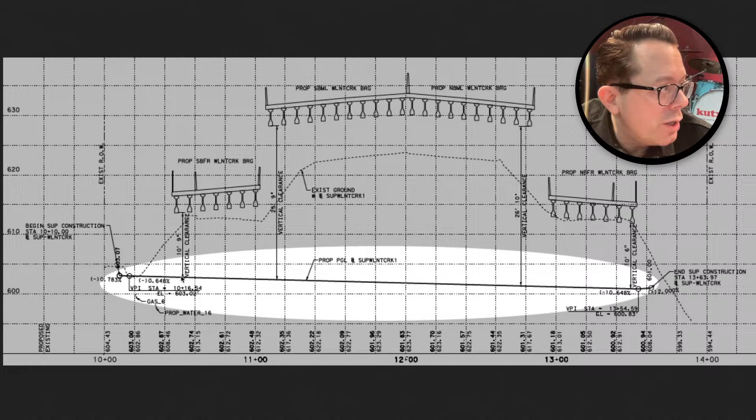Rundberg, same deal. Widen bridge. They're shifting out the U-turn lanes here to make more space on each side for some shared use paths. And as you scroll, you can check out all of the details on this. This is an illustration of that shared use path, I should say, sidewalk under Little Walnut Creek. So not much information here, but you will have about 10, 11 feet of vertical clearance on the

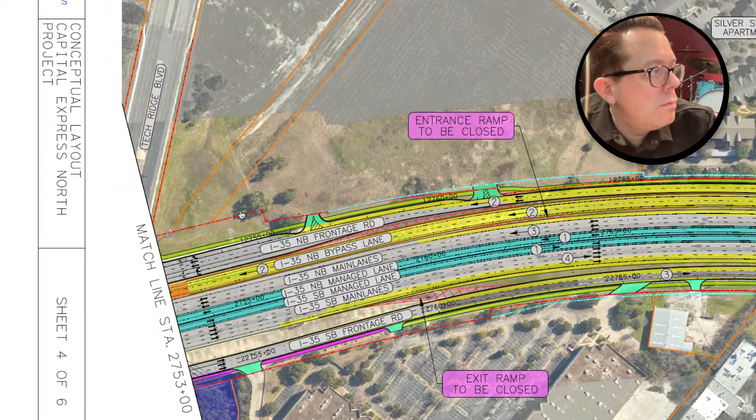shared use path. Okay, now let me just end with 183 and St. John's. Not a lot of changes there. Okay, so that's basically the whole story. Now, before I go, I just want to show you, as I've already done a little bit, these PDFs that are the 100% design plans, which you can download. It's 1.8 gigs. It's on the website.

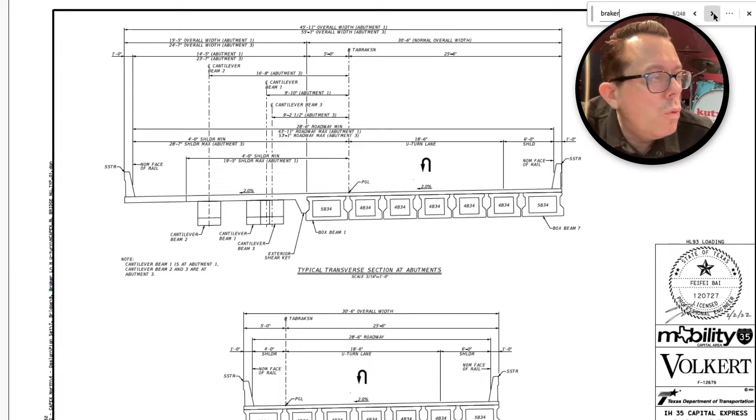And what I would like to do is, let's just say I live off Braker Lane. So what I might do is I might open up volume 4 and type Braker, and then I can just kind of skip through and get a flavor for if I really care about these changes, like what is coming to my area. And if you are interested in these, or maybe you're someone who is an engineer who works with these documents all the time, please let me know. Reach out to me. I'd be interested to hear your thoughts.